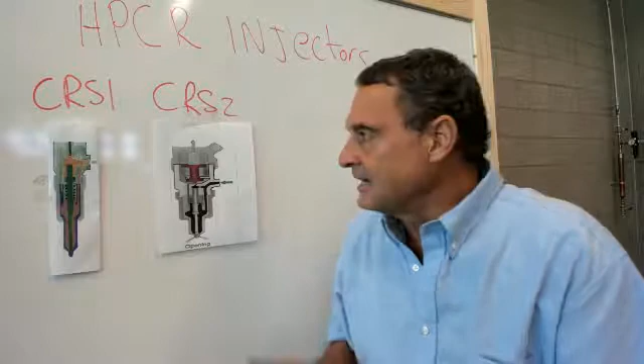Hi, Craig here. Today I want to talk about the 4 generations of high pressure common rail injectors. I've got a couple pictures here that I'm going to bring closer so you can see. This is the CRS1, and I'm going to bring this up really close so we can have a discussion about it.

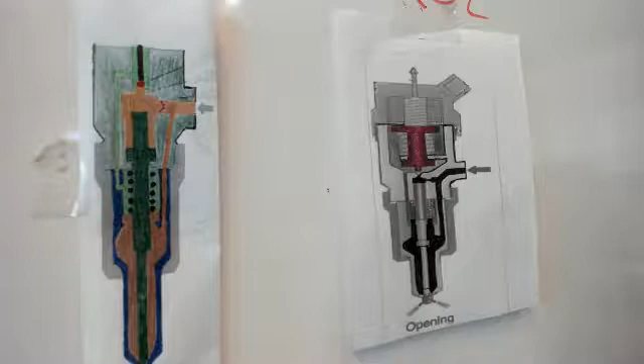So this is the first of the 4 generations of high pressure common rail injectors, and I'm going to explain briefly how they work. They use the principle of electromagnetic servo hydraulics, and what that means, you can't see it in this picture, is you have a solenoid here, and it's connected to this rod.

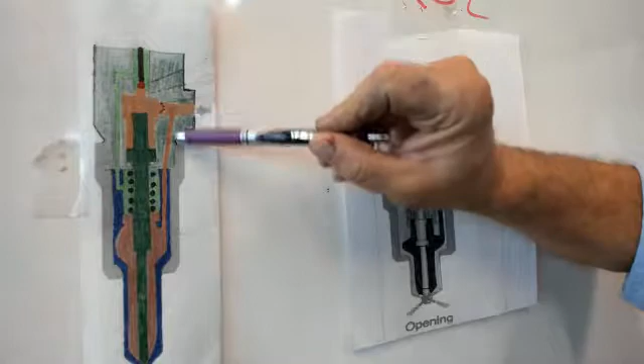This is a little ball that we're looking at right here, and this is high pressure fuel. So all this is high pressure fuel. It comes in, goes down here below. This is what we'll call the command piston, and it goes above. Now, the amount of pressure working on this area, and there's a spring involved, holds this injector down. With this pressure working on this surface area, it holds it down. Now, alternatively, there is pressure pushing up here.

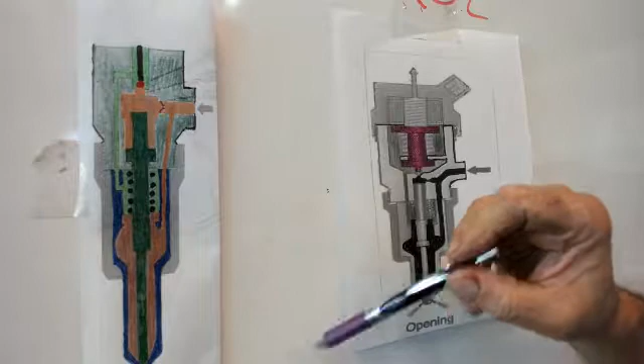So how this injector works is we have a computer that is timing when the injection should take place, and it charges up a capacitor bank. And when the computer decides it's time, it sends a signal to the solenoid, which releases this small rod, and then this high pressure fuel is going to force that ball up, and this fuel is going to go back down to the drain circuit.

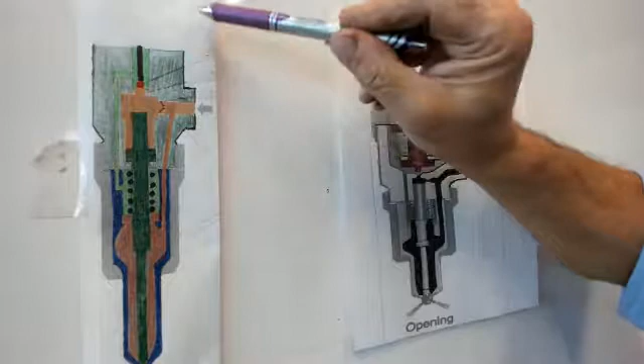Now, when that ball is forced up because of the high pressure, this command piston lifts and injection begins. I should also mention that this orifice where it's being covered by the ball, there's also an orifice here, and they have to be balanced. So there's a number on the injector that is put into a computer when the injector is changed, so that the balance between this orifice and that orifice is correct. Otherwise, if this was too big, you would have a slow end of injection.

So being that they're balanced, this ball will be lifted up by this pressure. That pressure will go to the drain circuit. This command piston will lift up and it'll inject. Now, when the end of injection occurs, the signal will go from the computer through the capacitors and close the solenoid. It will release the electrical signal, and this will come back down by spring pressure. There's a spring in here, not shown. So that's the injection. You can get 3 of those per combustion cycle on the CRS1.

Now that was just about 20,000 psi. The CRS2 is right here. I'll just get a good picture of that. So it uses a ball. It doesn't look like a ball, but it is a ball here. And you can see now that we have 2 springs, and we can see the solenoid.

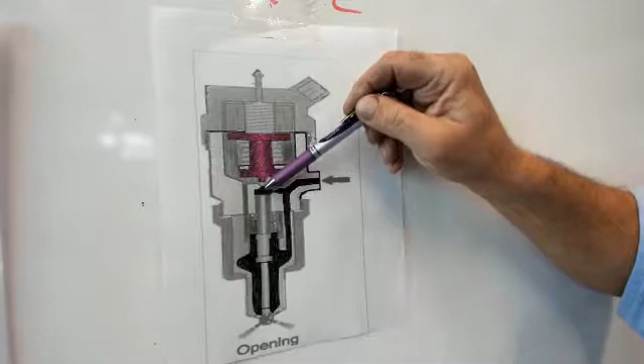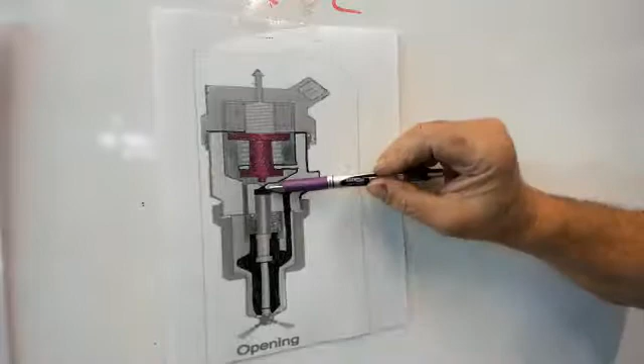Same idea. What's changed here is they've balanced the springs. Again, we're going to have high pressure fuel in this area, and then below the command piston. And when this is in the up position right now, but when it's in the down position, it's at rest, and the springs are holding it down. When the solenoid excites, keep in mind this is an electro-servo hydraulic solenoid, it's going to lift up, pressure is going to flow to the drain circuit, injection begins.

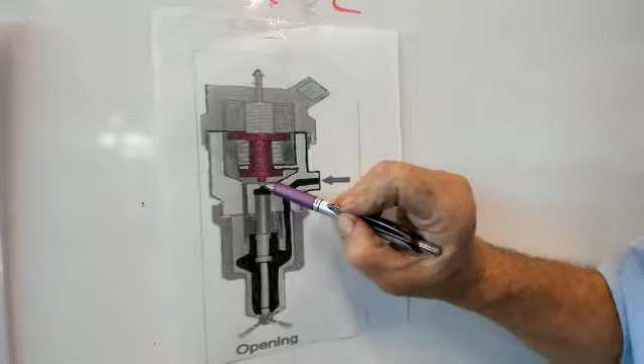This was around 23,000 psi, and it was capable of 4 injections, where the previous injector was capable of 3. The drain orifice in here is actually really easy to see in my coloring, in my drawing. And again, it balances between this orifice and this orifice to make sure that it's correct.

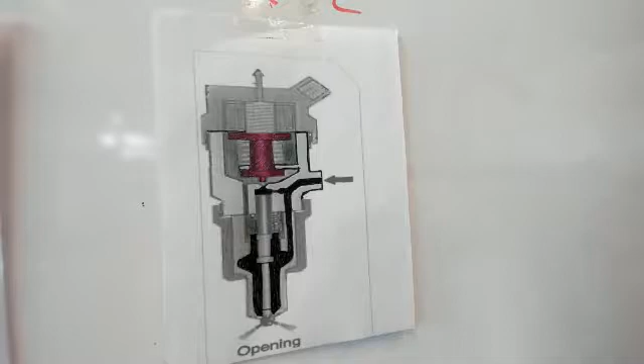Now, the CRS2 was better balanced with the springs and had a lighter servo valve, so it was able to open and close quicker, gaining the extra injection. So these were the early common rail injectors, and we can see we've gotten away from the great big solenoid on the outside of the injector. The parts are much smaller. We're using high pressure fuel to open and close the injectors, and only a small solenoid to control it.

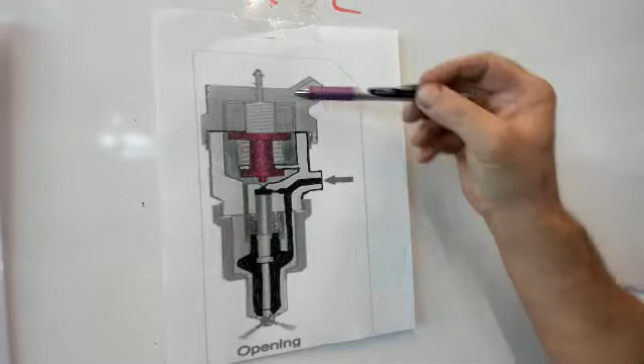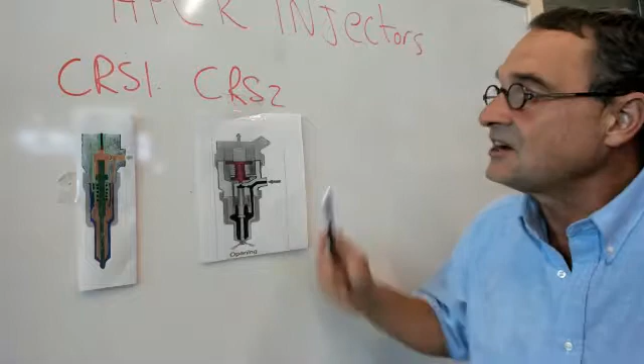So I hope you found this helpful on how injectors work, and I will make some videos on the CRS3, which is the 3rd generation of injectors, which we call piezoelectric.